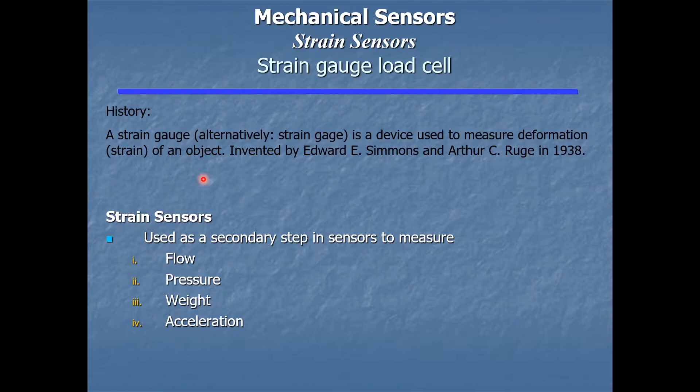There are several types of strain sensors, and they are used as a secondary step in sensors to measure several kinds of parameters such as flow, pressure, weight, and acceleration. So these are all examples of parameters that can be measured using the deformation of materials, which is measured as strain.

The most common type of strain gauge consists of an insulating flexible backing which supports a metallic foil pattern. So this is the insulating flexible backing, and this is the metallic foil pattern. And the gauge is attached to the object by a suitable adhesive. So as the object is deformed, the foil is deformed as well, causing its electrical resistance to change.

So whenever we apply, for example, force onto these insulated materials, since it is flexible, it will deform. For example, when it is stretching, this metallic foil will also stretch. So consequently, the resistance in this metallic foil will be affected. If it's elongated, the resistance will increase. When there is tension, it will make the material elongated, so due to that, the resistance increases.

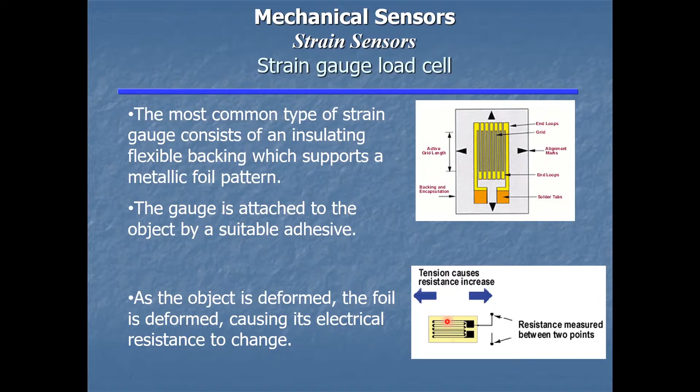Why is it increased? When it's elongated, what happens to the length of this metallic foil? It will increase as well. And meanwhile, the width of this metallic foil will decrease. If you remember the relationship, the resistance is directly proportional to the length and inversely proportional to the cross-sectional area of the material. So due to that, the resistance will increase when there's tension.

So this resistance change is usually measured using a Wheatstone bridge. Basically we have the sensor, and we need a signal conditioner, where we want to convert the change in resistance caused by whatever we are measuring, for example force, into a voltage output in order for us to read.

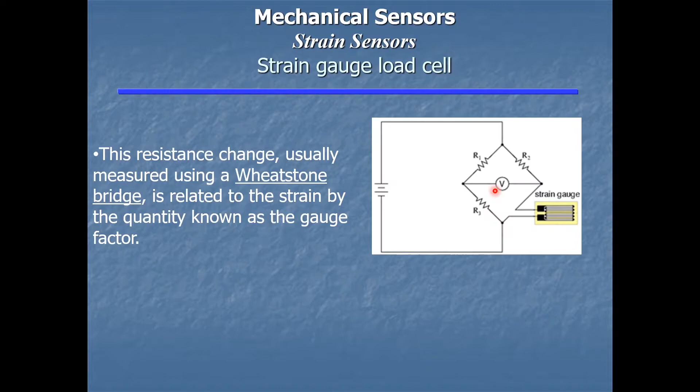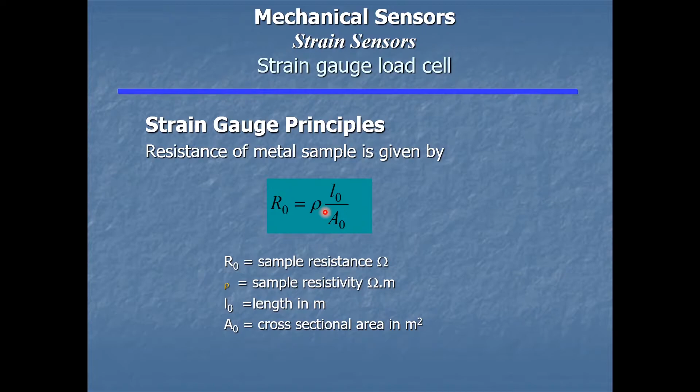So we use this Wheatstone bridge to convert the resistance change into voltage change. This is how the strain gauge is connected into the Wheatstone bridge. This is the relationship of the resistance of metal with the length and the area. The sample resistivity is basically constant, and the original sample resistance equals the sample resistivity multiplied by length and divided by the cross-sectional area.

So if the material is stressed, what is going to happen? There will be a positive change in length. This is what we call Poisson's ratio. When there is a change in length, due to the conservation of mass, the mass and volume need to be maintained. So the area will change in the opposite sign as the length. If the length is elongated, the area will be narrowed down.

It will become narrower. For example, you have a rubber and you stretch it. The length, of course, is going to be elongated, but the width of the rubber will become thinner and thinner. It's because the volume will remain the same, but since you change the length, the area will change as well. Therefore, the resistance of the sample will change. So this is the new resistance.

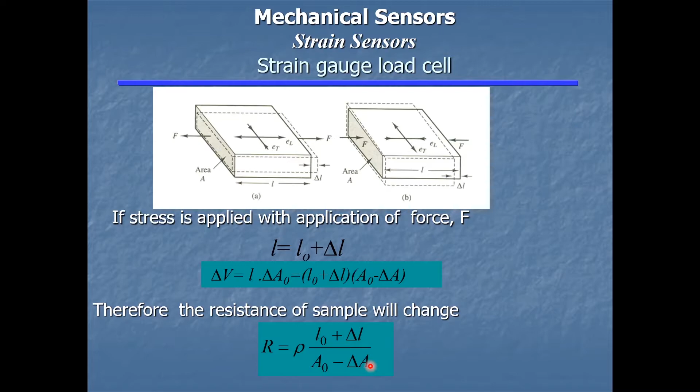Resistance is directly proportional to L and inversely proportional to area. So when you apply stress, you are going to increase the L, and also decrease the area at the same time. And if you compress it, the length becomes L naught minus delta L. Meanwhile, the area is increased, A naught plus delta A. So this is the new resistance.

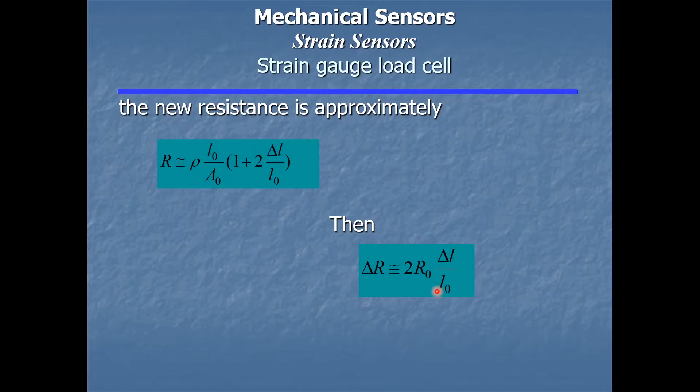So you don't really have to memorize how to derive this. Basically, approximately the change in resistance is equal to two times the original resistance multiplied with the change in length over the original length. This is gauge factor. Gauge factor is the ratio of the change in resistance over the original resistance, divided by the strain, where strain is defined as the ratio of the change in length over the original length.

So a Wheatstone bridge is a divided bridge circuit used for the measurement of static or dynamic electrical resistance. The output voltage of the Wheatstone bridge is expressed in millivolts output per volt input. The voltage output from this Wheatstone bridge is usually very small. The Wheatstone bridge circuit is also well suited for temperature compensation.

For example, if you apply pressure on the strain gauge, the temperature in the room where you apply this sample is probably going to affect the resistance as well, so it needs to be compensated. So this Wheatstone bridge can help to eliminate the temperature effect.

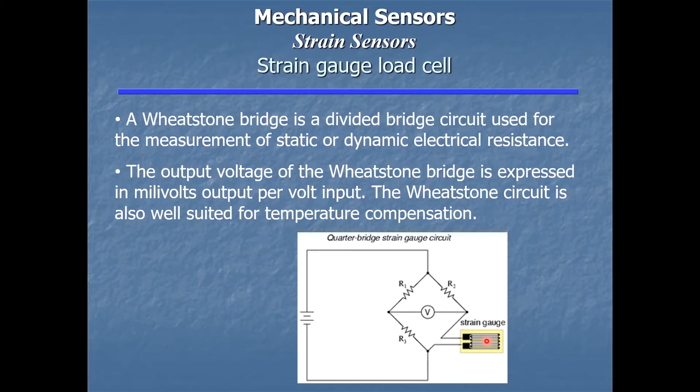Typically the rheostat arm of the bridge, R2 in the diagram, is set at a value equal to the strain gauge resistance without any force applied. So R2 is equal to the resistance of the strain gauge, and the two ratio arms of the bridge, R1 and R3, are set equal to each other. We want this because we want to satisfy the null condition.

If you remember, the null condition is where R1 times R4 is equal to R2 times R3. Each one is multiplied with its opposite: R1 and R4, and R2 and R3. So by having R2 equal to R4 and R1 equal to R3, you satisfy the null condition. When there is no force applied to the strain gauge, the bridge will be symmetrically balanced and the voltmeter will indicate 0 volts, because it is satisfying the null condition.

As the strain gauge is either compressed or in tension, its resistance will decrease or increase. If it is compressed, the resistance will decrease. If it is in tension, the resistance will increase. The unbalance in these two legs of the bridge will produce an indication at the voltmeter.

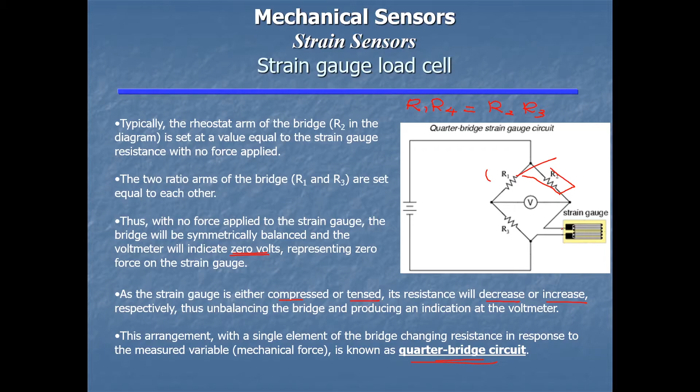This arrangement, with a single element of the bridge changing resistance in response to the measured mechanical variable, is known as a quarter bridge circuit. A quarter bridge circuit means you have three fixed resistances, 1, 2 and 3, and only one changing resistance. So 1 out of 4 can change its resistance. So this is the quarter bridge.

An unfortunate characteristic of the strain gauge is that its resistance changes with temperature as well. For example, if you want to measure force, the strain gauge is affected by the temperature at the same time. There is a way to eliminate the effect of temperature change on the change in resistance: we can use a dummy strain gauge.

The dummy strain gauge is placed on the same leg as the strain gauge, on the right side, as you can see from this figure. The top one, located at R2, is the dummy, and this one is where you apply whatever you want to measure. So this one is unstressed, and this one is stressed. The stressed one is what you use as your sensor.

By doing this, both elements of the rheostat arms will change resistance in the same proportion when temperature changes. If you notice on the previous slide, it mentioned that R2 and R4 need to be equal, while R1 needs to be equal to R3.

They must be equal to each other when there is no force acting on it. So when there is no force, the R4 will be unstressed as well. But when there is a temperature change in R4, it will change in R2 as well. For example, the resistance in R4 is increased due to temperature. What happened to R2? It will increase due to the temperature as well.

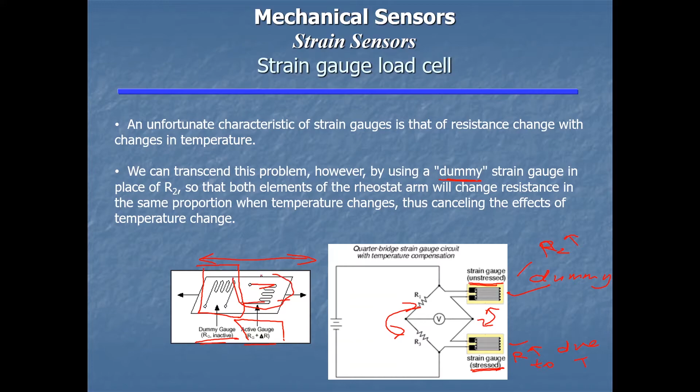And how you want to set this as unstressed usually is you put it in these directions like this. So whenever there is a stress, compression or tension on the material, the one on the left, the dummy gauge, is not going to be really affected by the elongation or compression, but with the active gauge, the effect of the elongation is very significant if you put it in this direction. So when you elongate or compress it, it's going to affect. So this is how you set up your active gauge, and this is how you set up your dummy gauge.

Okay, one arm bridge. So this is what we call a one arm bridge. It's like one of the arms. The active strain gauge will be given by these equations. RA equals R times 1 plus delta R over R. Basically, you don't really have to memorize this. I would suggest you memorize the Wheatstone bridge equation instead.

This kind of equation is usually a simplified version where you use the same resistance for all resistors, whereas in some cases you can use a different resistance for, for example, R1 and R3. Basically, it will be best if they are the same. R2 and R4 will be the same, but R1 and R2 are not necessarily going to be the same, and same goes for R3 and R4. So I would suggest you just use these equations whenever you deal with Wheatstone bridge problems. And this is the way you can find the gauge factor and also the strain, the change in length.

Usually the gauge factor for an ideal case is equal to 2. If it's not mentioned anywhere in the problem how much the gauge factor is, and it asks you to find delta L or the strain, the ratio of this is basically strain. So if I ask you to find strain and it doesn't give you the gauge factor, you can just assume it equals 2. But most of the time the gauge factor is given.

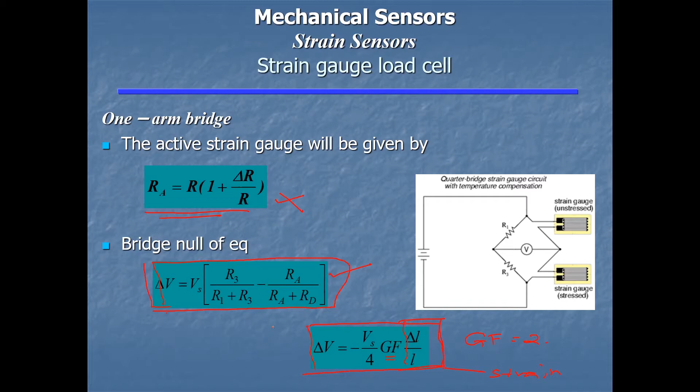Usually it's like 2.01 or 2.0, but you cannot go far away from 2. You can estimate; if you estimate 2.01 it is still acceptable, I can still give you marks. But if you suddenly say that GF equals 1 or GF equals 3, this is totally wrong.

Here you have an example: a gauge with gauge factor of 2.03 and resistance 350 ohms is used in the previous figure. The bridge resistors R1, R2 all equal 350, and the dummy gauge has 350 ohms as well. If a strain of 1450 micrometer per meter is applied, find the bridge offset voltage if Vs equals 10 volts. Find the relation between bridge off null voltage and strain. How much voltage results from a strain of 1 micro?

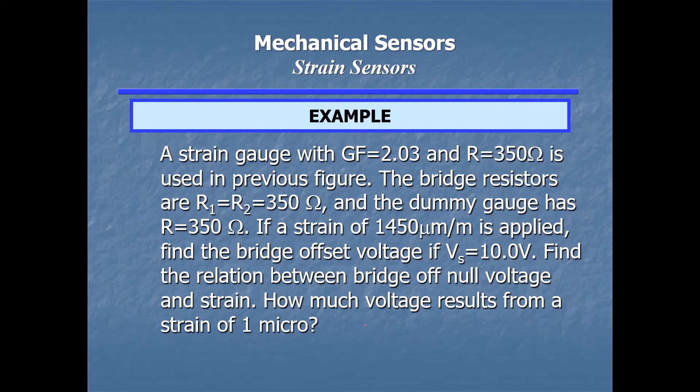So for this question, a lot of information is already given here, which are the gauge factor and the resistance for all resistors: this is the resistance for the strain gauge, this is the resistance for R1, R2, which are the fixed resistors, and 350 ohms for the dummy gauge.

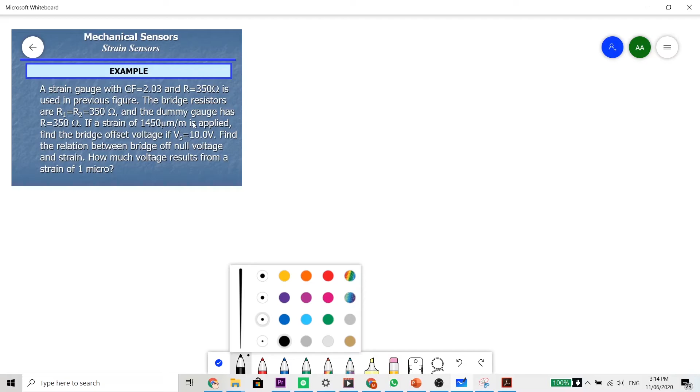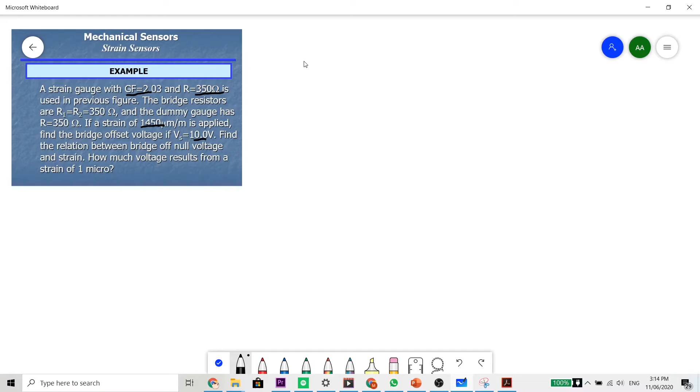So as we've seen before in the previous slides, the dummy gauge is used to eliminate the change in resistance readings and the change in voltage due to the change in temperature. So for these configurations, the change in temperature will not affect the change in voltage. The gauge factor is given here, 2.03, resistance 350, the strain is 1450, and the voltage supply is 10 volts.

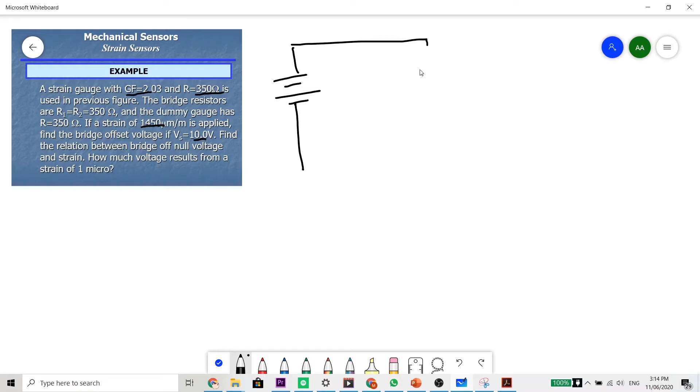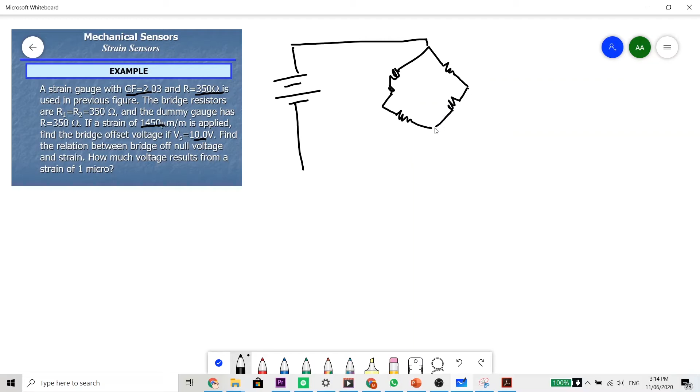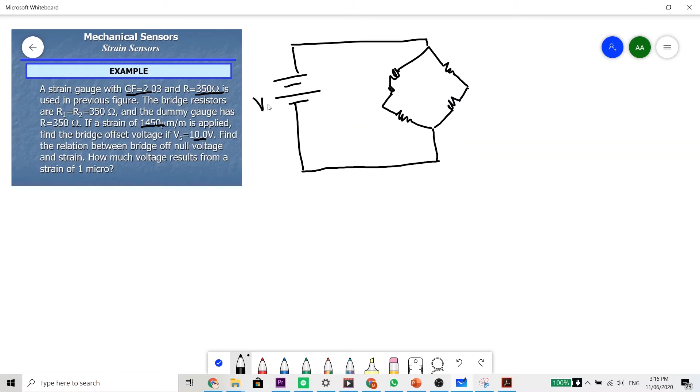The best way to start to answer the question is by first drawing the circuit itself, the Wheatstone bridge. Okay, so you have the resistance. I'm still adapting to using this pen, so that's why my handwriting is a little bit ugly. So you have here VS, and there is R1, R2, R3 and R4.

If you remember the previous equations, GF is equal to the ratio of the change in resistance over the original resistance, over delta L over L, where the bottom one is equivalent to the strain. So the strain is already given, GF is already given, and the same goes for this resistance, R4, which in this case is 350.

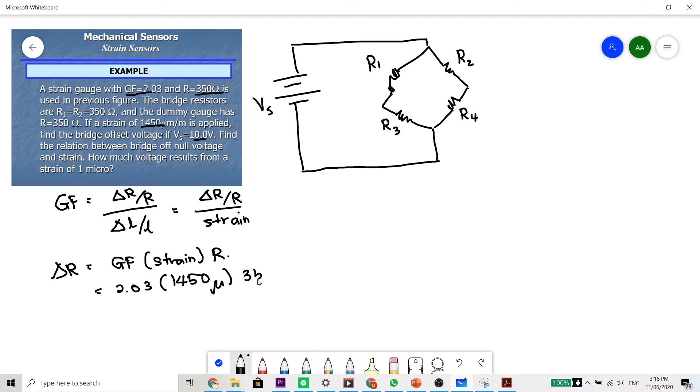So rearranging this equation, you get delta R equals gauge factor times strain times resistance. So from here, 2.03 times 1450 micro times 350 ohms. Here you get 1.03 ohms. This is the change in resistance.

You just assume that delta L is positive, so the change in resistance is positive. So we assume that the new resistance is R4 plus 1.03. We go back to the equation of the voltage difference. Here we get Vs times R3 over R1 plus R3, minus the new R4. The new R4 will be R4 plus delta R.

The original one is the null condition: we don't have any delta R, so we don't have any delta V. But here this is the result of the change in resistance, so we expect a change in the voltage as well. For the bottom one it's R2 plus R4 plus delta R. This really comes from delta R.

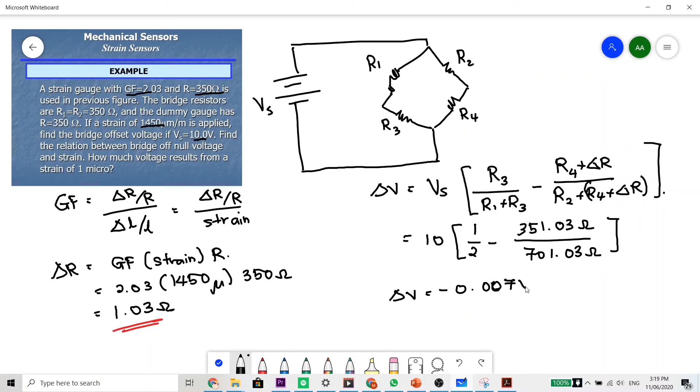So the change in voltage that you expect due to the change in resistance here is about negative 0.007 volt. Now we are going to find the difference voltage from a strain of 1 micro. So this question is asking for sensitivity.

The sensitivity is defined as delta V equals minus Vs over 4 times the gauge factor times the strain. I didn't mention in the slide before that this number 4 is just for those that have only one active strain gauge. For this case, I just realized that R2 is here and this is the dummy. The only active resistor is R4.

So if this Wheatstone bridge is a quarter bridge, you have only a quarter. If it is a half bridge, meaning there are 2 active resistors, the sensitivity is minus Vs over 2. If it is a full bridge, there is no number 4; it is minus Vs GF times strain. So half bridge and full bridge are more sensitive compared to a quarter bridge.